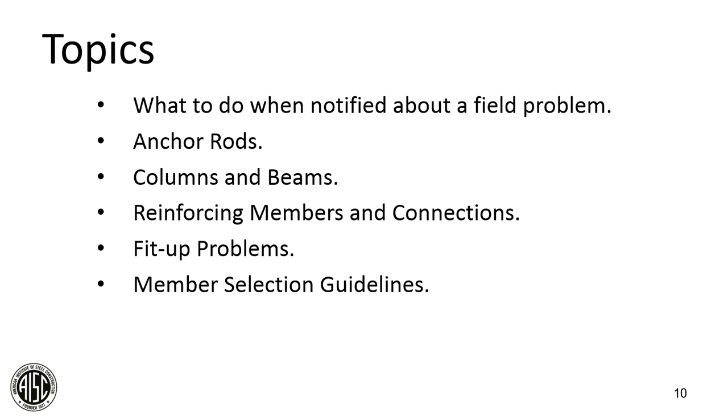Now, what to do when notified about a field problem? I think the most important thing is to make sure you have accurate information. If you don't have accurate information, you can waste a lot of time. So photographs, telephone calls, you need the information, especially if you can't get to the job site if it's some distance away from you. Act immediately to avoid any delayed charges. Whether you think you did something wrong or didn't do anything wrong, it's important that you jump in and help so that the delayed charges are minimized.

Next, try to determine the cause of the problem. Is a fix required? Lots of times you can, as we used to say, sharpen your pencil, and you may find that you don't need a fix. If no money is spent on a fix, then there'll be no argument as to who pays for it. Think primarily about labor costs in fixes—materials are cheap. The cost of the engineering, the cost to the erector and fabricator in doing the fixes, their labor is far more expensive in general than the material.

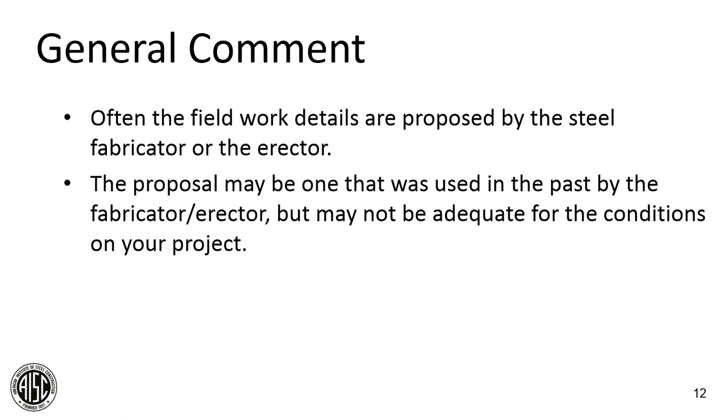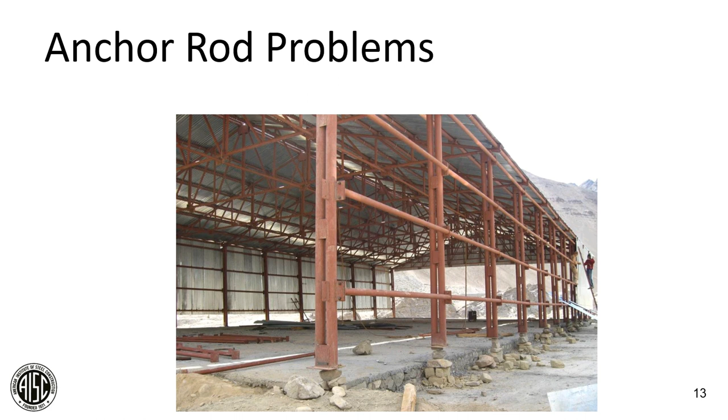So that's all a matter of sequencing. This is also one of my favorite slides.

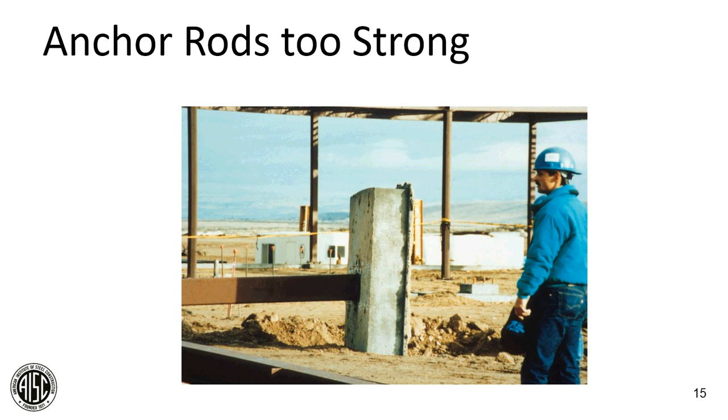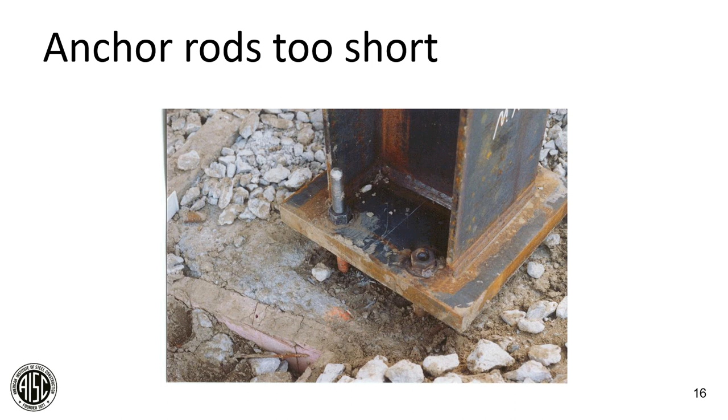If they're too short, there's lots of things you could do. You could extend the anchor rod by welding on a threaded rod to the anchor rod. You can use a coupling nut. You may have to cut some rods off. You may have to drill and use epoxy anchors. You might be able to weld the base plate to the rods.

And I'll say this several times throughout this presentation: remember that you cannot weld to high-strength rods, those that are 105 KSI anchor rods. You can also perform an analysis to see if the nut is not all the way on, say it's only 3/4 of the way, to check if there are enough threads engaged to do the job. Because you have to know the purpose of the anchor rods, and if it's just for temporary erection, then that certainly would be a permissible thing to do.

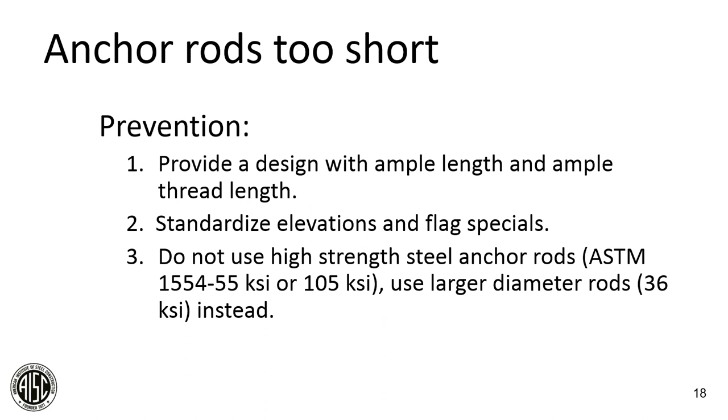How do you prevent this situation? Well, we're showing it because you can't always prevent things, but make sure you provide a design with ample length and ample thread length. Standardize the elevations of anchor rods as best you can, and make sure your plans flag special conditions, because the person setting the anchor rods will get used to one detail and may forget about special situations, and that's when you run into problems. As I stated, don't use high-strength anchor rods, 55 or 105 KSI. It's often better to use larger diameter rods, like 7/8 or 1 inch, because then if welding is a solution, it's much easier to accomplish.

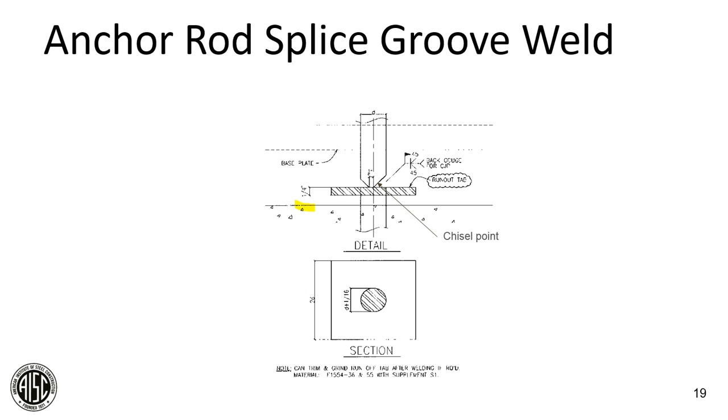Here's a detail of an anchor rod splice. Let me see if I can get a pointer up here. I'll use a highlighter instead. Here's the top of the concrete right here. And this is a chisel point coming down, with a backer bar here. That solution has been used successfully.

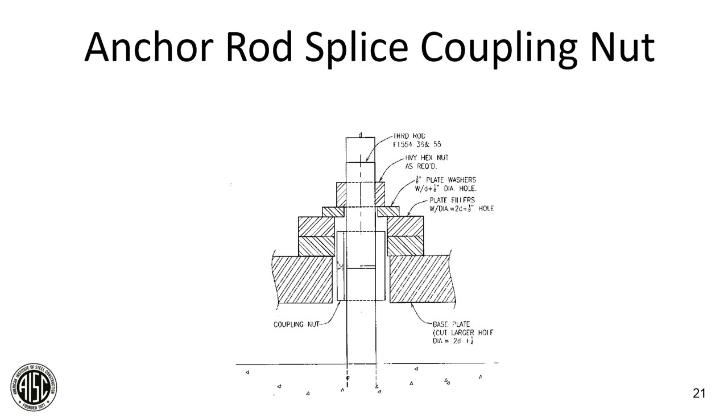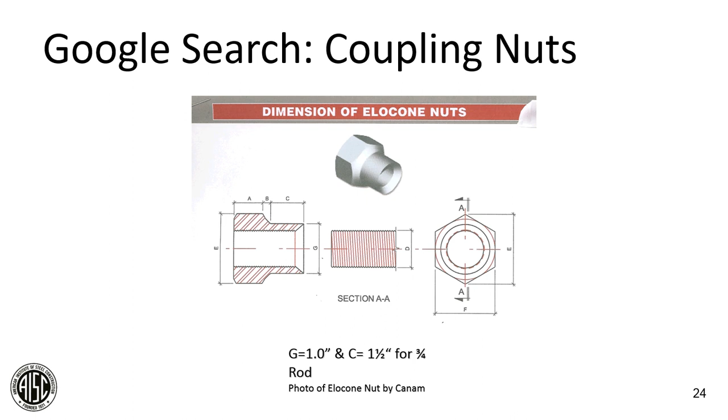You can certainly provide washers if they're too long, kind of like a little pipe thing done in the previous slide. You can weld the rods to the base plate if insufficient thread length exists, so long as they aren't high-strength anchor rods. Or you might be able to thread the rod in place to run a nut down.

Prevention: make sure your details have plenty of extra threads on the anchor rods, and again, check for proper embedment if they are too long.

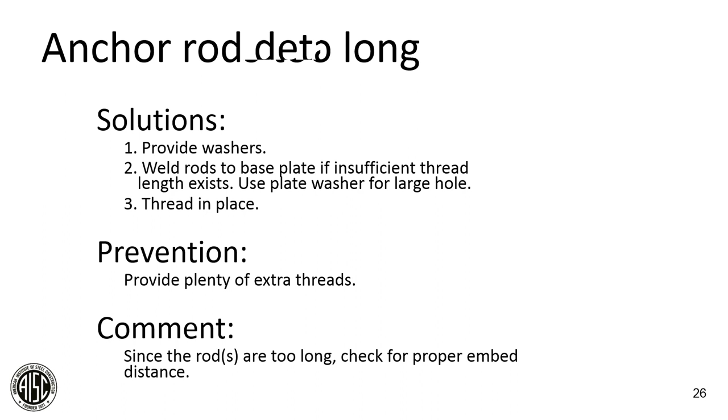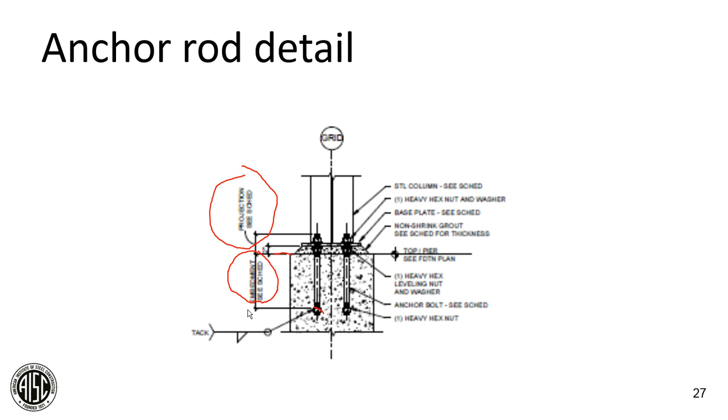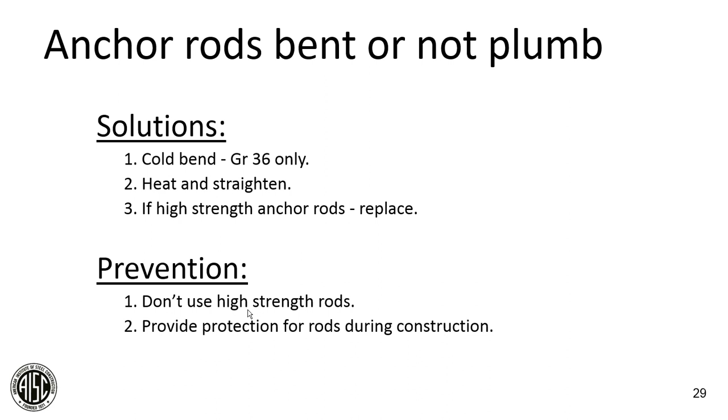Often you can cold bend A36 rods back to being straight. You might also be able to heat them and straighten them. Again, that's A36 material. If they're high-strength anchor rods, you probably can't bend them back because there's not enough ductility to keep from cracking them. So I recommend, if at all possible, not using high-strength rods. You're better off using bigger diameter 36 KSI rods, and certainly there should be protection provided for the rods during construction.

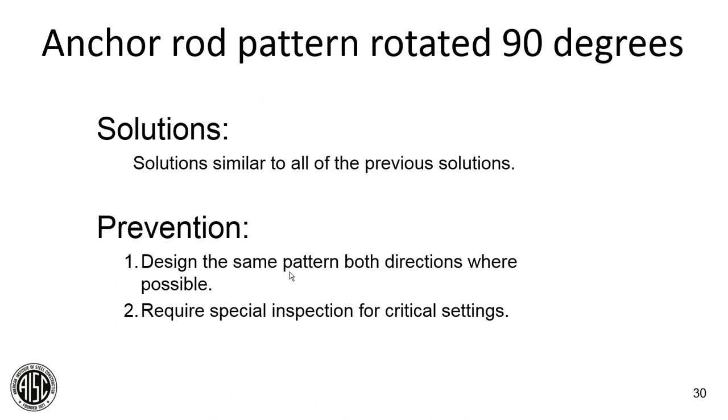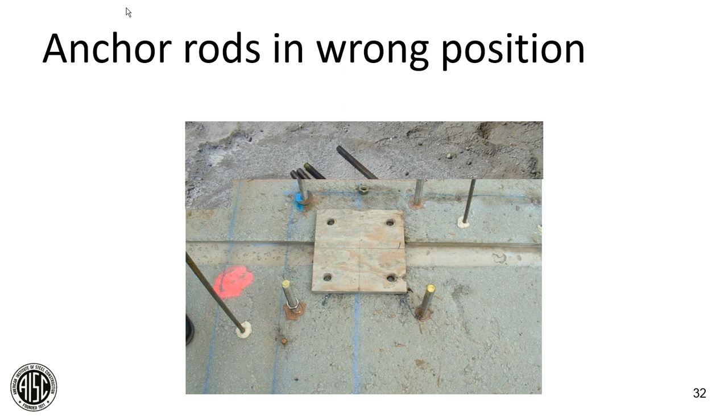Again, for thinking about anchor rods in the wrong position, this was an interesting project where the detailer showed the distance on the setting plate incorrectly. It was supposed to be a setting plate that would accommodate the anchor rods as they are shown outside of the setting plate. So what happened was the anchor rods had to be burned off and new ones drilled in, and it was a fairly expensive situation. You can see here where they're burned off. There were, by the way, 1,300 anchor rods on this project that had to be redone.

So what are some of the solutions? We've talked about some of them. Evaluate the need for anchor rods. Cut the rods and use epoxy anchors if required. You might cut the base plate and use plate washers. You might on occasion have to fabricate a new base plate. Might have to modify the column web or flange as required. You might have to bend the rods into position, and that may of course cause you to chip away some concrete to be able to do that.

From a prevention point of view, we say use a qualified field engineer. It wouldn't have to be a registered surveyor, but a good field engineer to lay out the anchor rods. We often say to survey the location of the rods before column fabrication. That's kind of a joke in the sense that with all the fast track things we do today, quite often that is not done. But make sure you use AISC recommended hole sizes, use symmetric patterns for the anchor rods, and use wood or steel templates. The key word here is firmly fastened to the footing or piers so that you have the correct location of the rods.

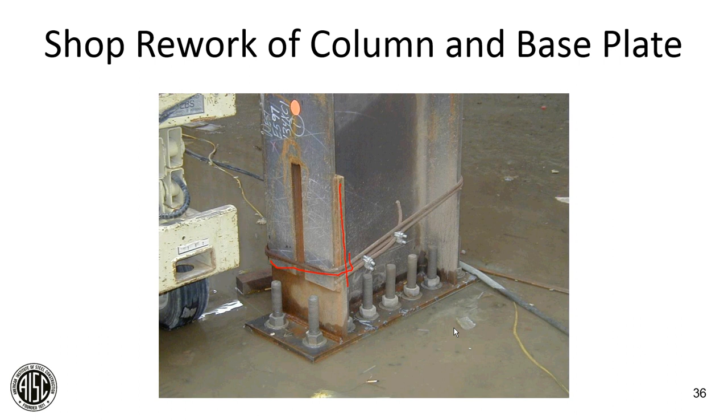This picture just shows a condition where anchor rods are in place and the column had to be modified and then welded to the plate as shown here. You can see here was the original flange, and this is the new column, but it was left in place. Again, I don't know why these were put in the wrong place, but they were, and I don't like the fact that there were so many. I would have thought that the engineer might use fewer anchor rods.

One of the other things that happens, base plates can punch through leveling nuts. What's the solution to that? Well, generally it's to jack the column up and grout it. Prevention: use large, thick washers when using leveling nuts so that they don't punch through. Specify proper grouting time in your specifications. And for heavier loads, it's probably better to use shim stock or setting plates instead of leveling nuts when you have the large loads.

So those are, again, things that can happen. Let's discuss for just a moment what the proper specification for anchor rods is. I think most of you know this today, but anchor rods are controlled by ASTM F1554. There are two items of interest on 1554: they relate to classification and also product marking, and that's color-coded.

The A36 rods are supposed to be color-coded and shown in blue, 55 yellow, and 105 red. The 55 rods can be obtained in diameters up to 4 inches, and the 105 rods can be obtained up to 3 inches in diameter. Also, for the 55, you can ask for what's called supplement S1 to require that the material is such that it is weldable.

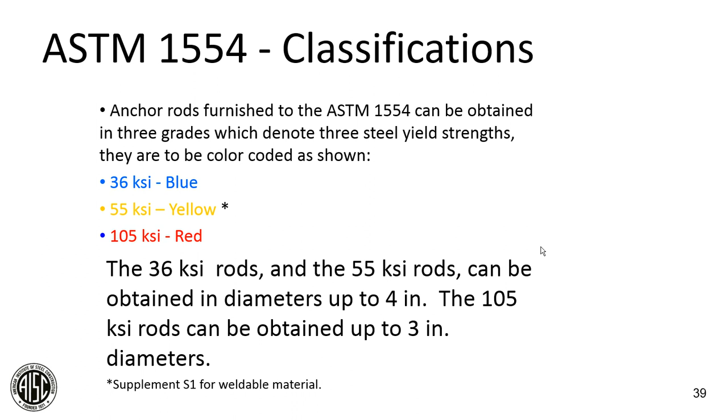I mentioned earlier the recommended anchor rod hole and washer size. This is straight out of Table 14-2 of the 15th edition of the AISC manual. You can see for the anchor rod diameter given, the hole diameter, minimum washer dimensions, and then the minimum washer thickness. So that's right out of AISC, and I recommend that you use those particular hole diameters.

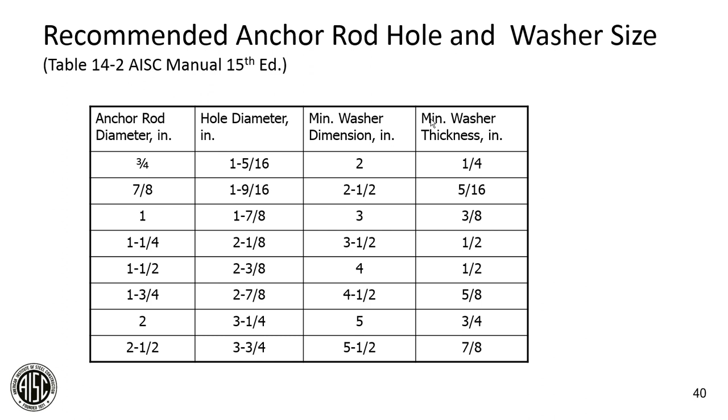Make sure that you use F1554 material. Use grade 36 where possible, and rather than high-strength anchor rods, use larger diameter A36 rods. Use a symmetrical pattern if possible. Use heavy hex nuts.

Coordinate anchor rods and reinforcing steel. Especially, if you have a condition with a pier and several anchor rods, things can get quite congested. Make sure things are drawn to scale so you know whether the anchor rods can actually be positioned properly into the pier. And don't use piers that are too short, which don't allow for the development of the anchor rods. A lot of the calculations for this are addressed in AISC's Design Guide 1.

Some more information on details. Provide adequate grout thickness, usually at least 2 inches. You can use setting nuts for lightly loaded columns, steel shims for heavily loaded columns. Consider setting plates where grouting may be difficult. And you can often solve some nice problems using epoxy anchors for fast track jobs and complex layouts. Again, consider construction sequencing when laying out the pattern.

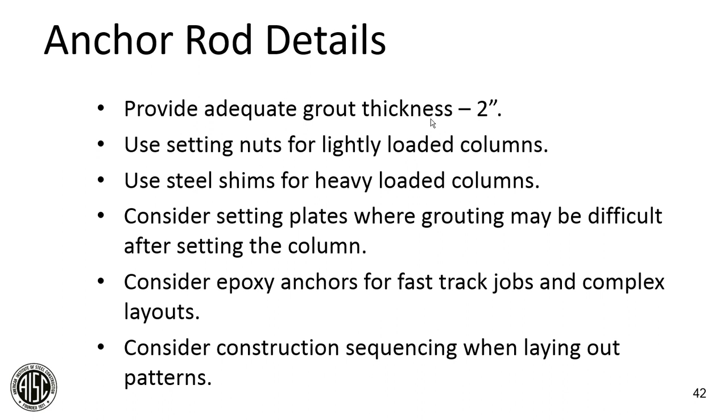Remember that OSHA 1926.755 has the requirements of a minimum of 4 anchor rods, and information about an iron worker with his equipment being 300 pounds and 18 inches eccentric from any column face. To me, it's sort of a phony thing in that the requirements on the anchor rods are so minor for that 300 pounds at 18 inches.

I think a lot of erectors get a false sense of safety in that they think the anchor rods can adequately prevent the partly erected steel from falling over under wind, but it's not true. Those have to be evaluated.

OSHA says that you can't repair unless you get the approval of the structural engineer of record, and the approval must state how you're going to do the repair or how you're going to guy the column if it only has 2 anchor rods. And lastly, the contractor shall provide written notification to the erector of any repair or modification that he or she may do. So I spent almost half an hour on anchor rods, and again, it's because it happens so frequently. I wish we could get rid of problems with anchor rods, but I'm not sure we ever will.

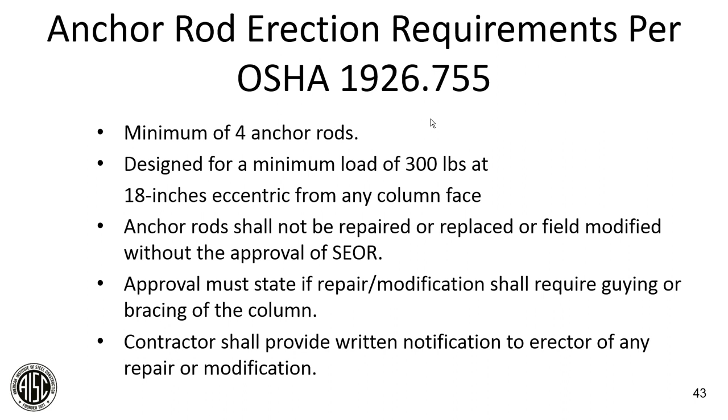So let's now discuss some columns and beams, and some requirements for repair of them.

This is a funny looking column, of course. It was in a steel mill in the scrap yard, and the columns and crane runways in scrap yards are magnetic cranes generally. They are used and abused, the building significantly. In fact, AISE says that when you have a Class E magnet crane, the lateral thrust you must design for is 100% of the lifted load.

Well, this particular column had been reinforced once. It had been hit many, many times, as you can see, with the magnet, and did some nice damage to it. But hey, it's still standing up there. Steel is, what's our motto? Stronger and smarter. So it stayed up.

One of the things that happens fairly frequently is the column is not plumb per AISC Code of Standard Practice tolerances. So what you have to find out is, is it out of plumb? And if it's out of plumb, what can you do?

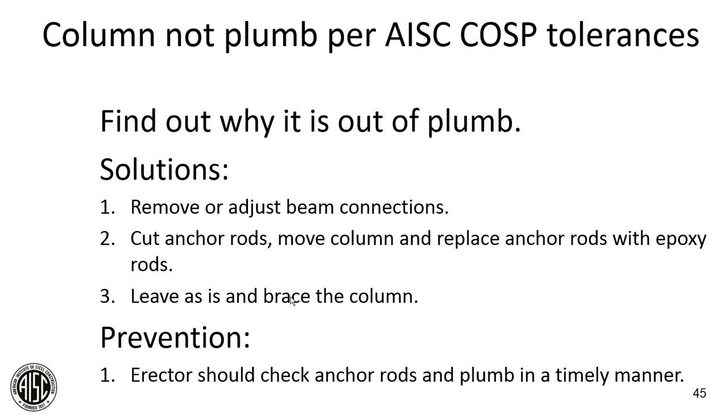Another thing that happens is after erection, the beam line is too short, which causes out of plumb columns at some locations. Weld shrinkage can cause shortening of approximately 1/8 inch in most CJP welds. And what do you do in that case? You may have to cut some loose and correct by weld build out or some other means to get the proper plumbness of the columns. That usually happens in very long lines of columns.

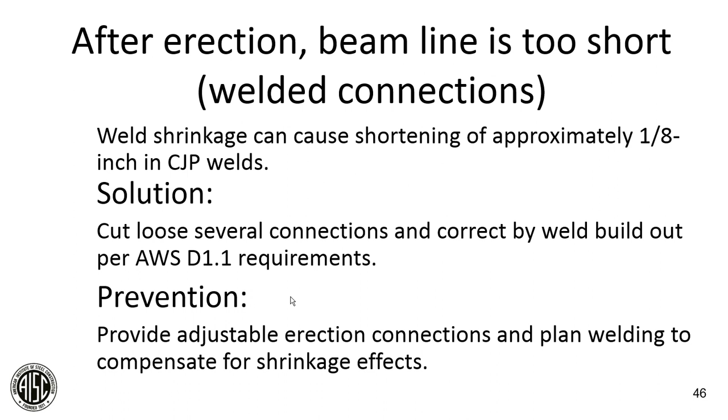Prevention: provide adjustable erection connections and plan welding to compensate for shrinkage effects. If after erection the beam line is too short or too long, and this can happen with moment end plate connections, if things have gotten too long, you may have to remove a beam. You may have to refabricate the end plate. You may have to shorten it up.

Another item which comes up on occasion is camber problems, primarily in multi-story projects. So you've got to think about what members you should camber if they need it.

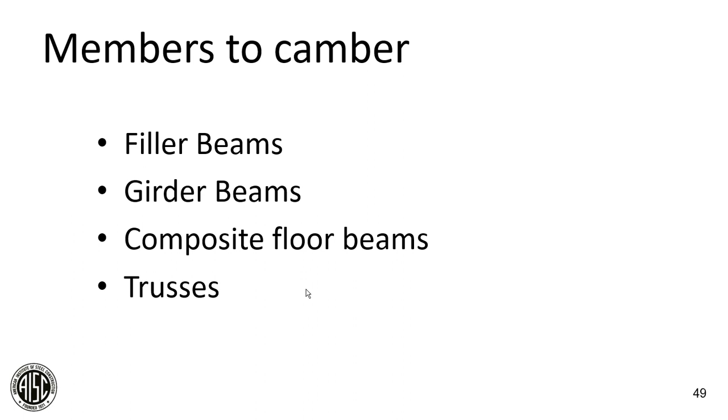Certainly filler beams are often cambered, the girder beams, the composite floor beams, and trusses. So those are the members that are often cambered. You might call me a bit of an ironmonger at times—if you don't need too much camber, I think you're often better off just selecting heavier beams and not being so worried about camber. But anyway, these are the ones that you should camber.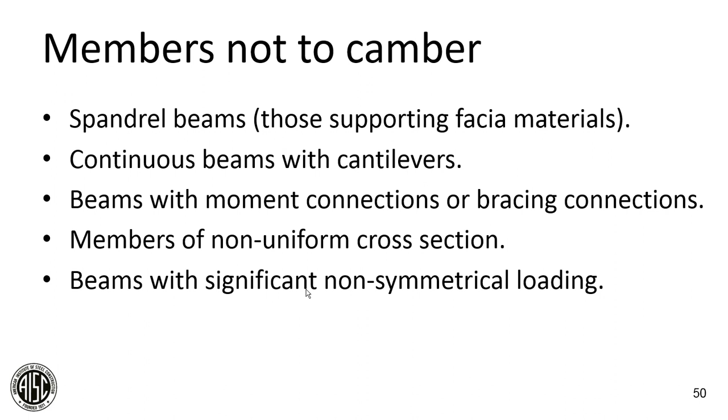You also should not camber beams that are subject to torsional loads. Beams less than 25 feet in length—generally 20 to 25 feet—you don't want to camber, because they don't have enough grip in the cambering machine to do the job. It's very difficult, so just use a heavier member.

You don't want to camber beams with webs of 1/4 inch or less, because the bending will likely cause the webs to buckle, same if the flanges are very thin. You don't want to camber something that requires less than 3/4 of an inch. And generally we do not camber runway girders—they're heavy enough that they don't need it, and it doesn't help.

So you might ask then, okay, we can camber, but what if there's too much camber? Some of the solutions are to place the concrete to a constant elevation. If you found out in time, you could remove the camber in the shop. You might have to replace some beams. Usually it's a concrete situation.

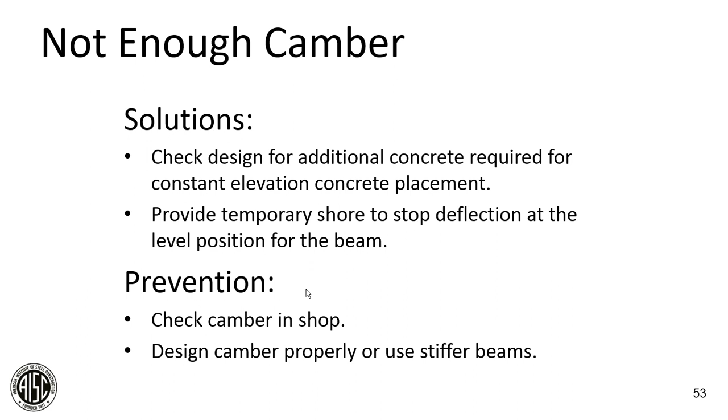Some cautions to think about: one thing you should consider is not to require as much camber for the beams at column lines as compared to filler beams, because the added connection restraint at columns will not allow as much of the camber to come out when the concrete is poured.

Also be very careful of camber differences between beams and open web steel joists. You can check with the SJI requirements on joist camber, and what you don't want is major differences with adjacent beams and joists, where the cambers are not compatible.

Also be careful of cambered beams or joists adjacent to non-cambered moment frames, braced frames or walls. I learned very early in my career about camber of deep, long span joists on a building—a hockey rink, I think it was a 200-foot clear span. I had a joist next to a masonry wall, and of course when it was set, it was roughly 6 inches above the height of the wall because I hadn't thought about the camber. So we all make mistakes—that was one of my early mistakes. I have more, but I don't want to tell about all the mistakes I've made.

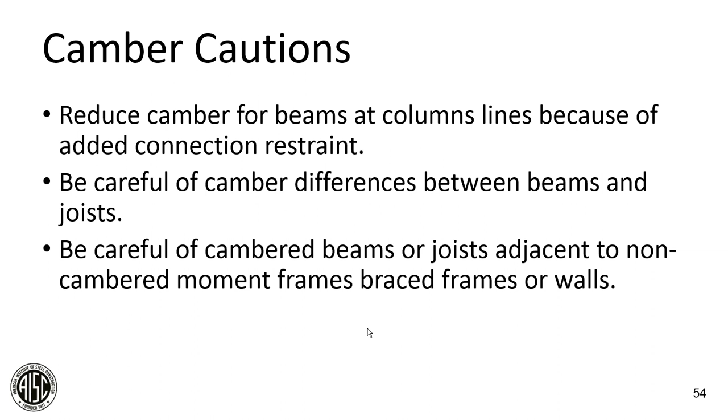From the AISC Code of Standard Practice, section 6.4.4, it says for beams greater than 50 feet in length, the camber tolerance is -0 plus 1/2 inch, with an additional 1/8 inch for each additional 10 foot in length or fraction thereof beyond the 50 feet.

The AISC Code of Standard Practice specifies that camber is measured in the unstressed position in the shop. You cannot measure camber once it's on the job site. If you want to check on camber, you do it in the fabricator's shop.

And what to do about extra concrete due to beam deflection during concreting? Solution: as I mentioned earlier, reevaluate the beam strength to determine if it can support the additional weight, or you may have to reinforce some members.

Prevention: you can design beams as though they're going to get extra concrete, and I think that's a very good solution because we know quite often that is going to happen. In our specifications we always allowed for about 10% more thickness than what the drawings called for, because depending on how they screed, you may get extra concrete. So it's a lot easier to have a little extra steel than to be worried about some overstressed member.

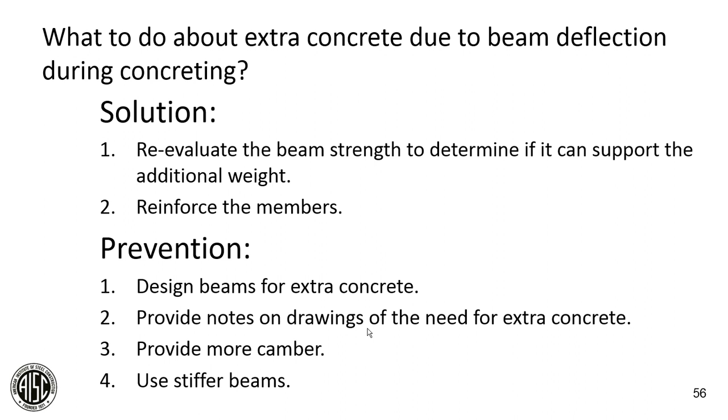A few comments now about shear studs.

What if shear studs break off during inspection? I think the way most people check shear studs is they put two studs in, then bend them over at least 30 degrees and inspect. They should bend over without the welds breaking, about 30 degrees. People just take a sledgehammer and knock them over, and if they're welded properly, they'll stay intact.

If there's only a few that might break, you can certainly fillet weld the studs in place. But if there's very many, you don't want to do that. So to prevent that problem, they've got to be installed properly. The stud gun has to be calibrated properly, and you can refer to AWS section 7.6 for qualification requirements.

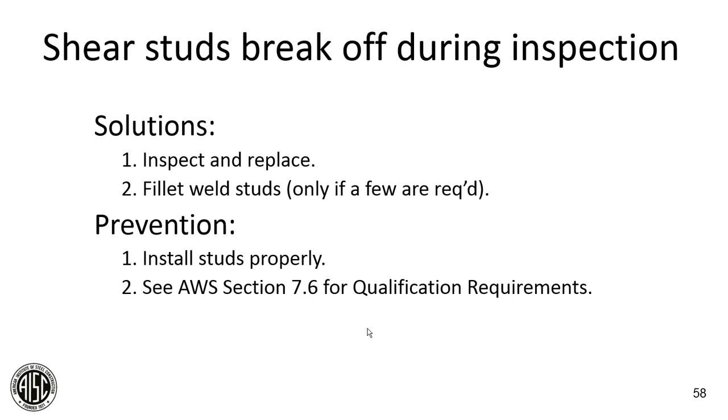Sometimes studs are too high, and this is found out, hopefully, before the concrete's placed. You can remove the studs and replace them. Again, you can use additional concrete thickness, or reduce beam camber by heat straightening. All those are expensive solutions, certainly, but if they're too high, they're too high.

Prevention: specify camber properly, or not at all. Don't use composite beams - that's a solution. And again, I've seen people use composite beams where they're short spans, and it just doesn't make sense to make them composite. Just forget the studs.

And also, you could design with some added capacity to prevent things. So if you need more concrete, you can get away with a little more concrete on the beams. A few comments now about fit-up problems.

The ones that I've seen most frequently are fit-up of weak axis moment connections, and I even hate to show this slide because it's a darn shame that we have a moment connection going into the weak axis of a wide flange shape. They're not rolled to have weak axis moment connections. You're far better off turning some columns in your framing situation rather than to create weak axis moments. But enough about that. If it does happen...

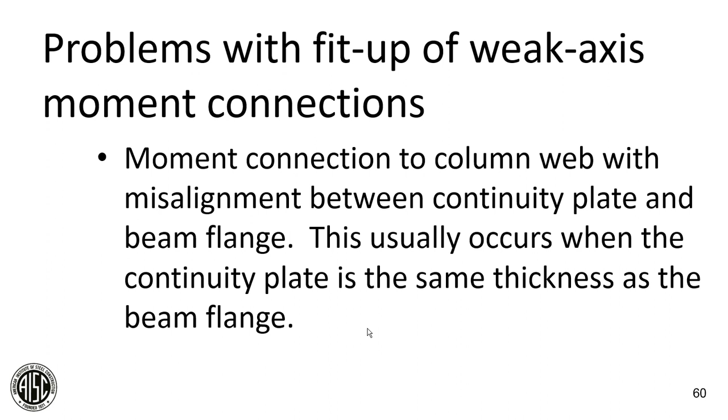Quite often there's misalignment between the continuity plates and the beam flange, and this usually occurs when the continuity plate is the same thickness as the beam flange. This particular slide shows that situation - the beam coming into the continuity plates doesn't hit the continuity plates exactly, resulting in weld problems.

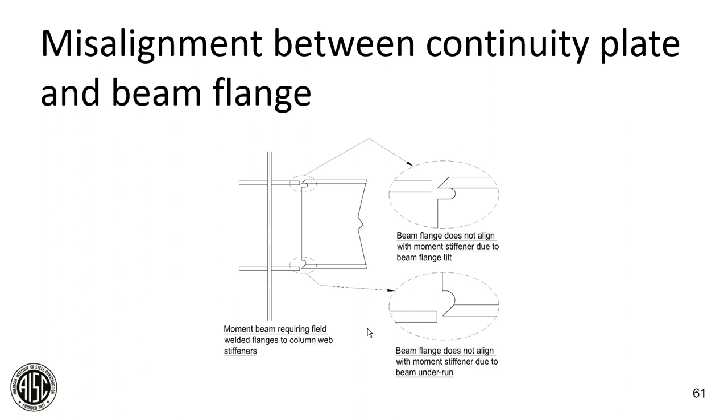This is all due to not the fact that maybe they were detailed incorrectly, in the sense that the detailer and engineers need to recognize the ASTM A6 tolerances on beams. I'll show a slide in just a moment on those, because otherwise this situation can occur.

What you should do is make sure that your continuity plates that you're framing into are thicker than the flanges of the beam. We show here upper flange stiffener detailed 1/4 inch greater than the beam flange thickness, and the lower one 3/8 greater. So they're bigger, but again, it's just material - that's not the big problem.

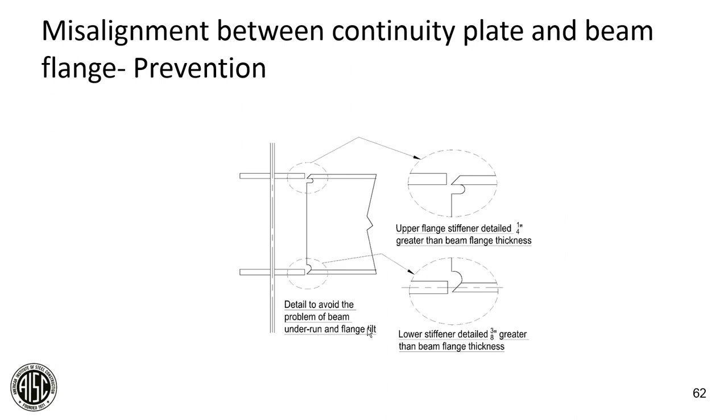If you can't get a proper weld there, you're going to spend a lot more money than having to provide a thicker continuity plate. The situation also occurs in conditions where you might have a bolted flange plate connection to, in this case, the strong axis of a column. You can see the gap here and here, and in this case the erector tried to pull the plates together, partially successfully.

This also happened to me once on a project where we had W36 beams and very large columns with wing plates like these. Unfortunately, the columns were fabricated by one fabricator and the beams by another, so no check was made on the under-run of the beams, and this caused a problem.

What you can do is provide some areas for shims in a detail like this, both at the upper and lower wing plates.

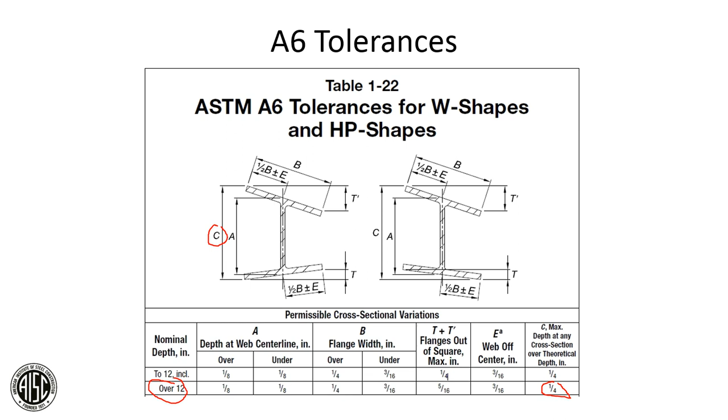Some solutions to this problem are certainly to jack against the beam by snugging bolts and then tensioning, and using shims, as I mentioned. If the beam does not fit between the plates, that's what I had to do on the big W36 I had - I had to remove the top plate and re-weld it to the columns. Provide the shim space, check your A6 tolerances, and modify the weld detail and weld sequence to reduce out-of-plane distortion.

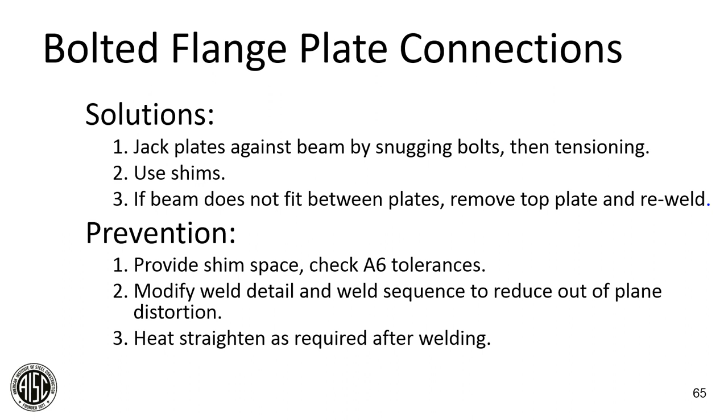Another question that comes up, and it's not really a field fix, is can welding to embeds damage the concrete? Yeah, too much heat can cause concrete spalling. However, I've seldom seen this as a problem unless somebody is really calling for very large CJP welds from a beam into an embed plate.

To prevent too much heat, I would suggest using fillet welds, looking at a proper weld sequence, and providing thick enough embed plates. By being thick, they'll dissipate the heat - they have a nice heat sink. As a rule of thumb, use a half inch minimum thickness for deck bearing situations, and at least three-quarter inches for beam bearing.

There is no such thing as an embed plate being too big, because they are often mislocated. Just make sure you specify them considerably larger in width and length or height than you need, because if they're off by a few inches, you want to be able to properly connect to them.

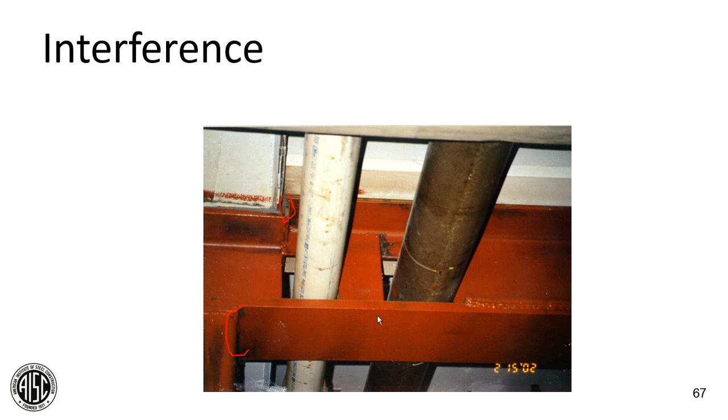This one I do know about. This building collapsed, but further downstream - it was the same column as the one shown here. At some point, obviously there were some pipes coming in, and one opening was pretty severe, and it buckled on the frame line one or two bays down.

That's just abuse, which you do find in some of the industrial applications. You don't find it that often, of course, in multi-story projects. But in some of the industrial applications, you find some crazy things that we can blame on the owner. I'm sure a fabricator didn't do that. I'm sure an erector wouldn't do that.

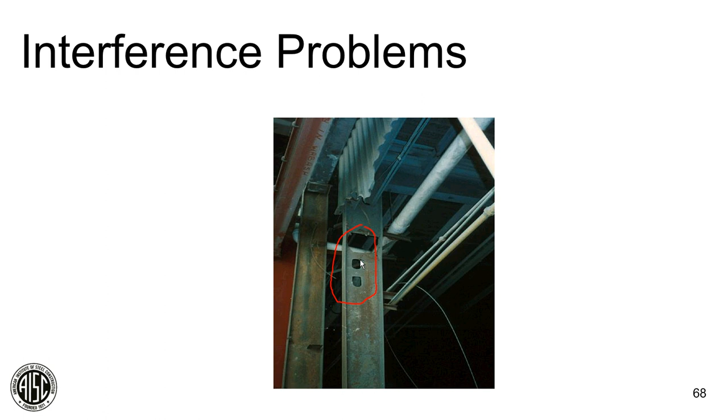Again, this was one I saw - pipe interference. The pipe was in the way, so of course the flange and part of the web was cut out so the pipe could be set down in there. Then a very, very nice splice was made here to keep the continuity. And yes, it was in the compression area, but it was at mid-span. I don't think if fully loaded it would work very well.

Also, one of my favorite pictures is shown here. Whoever's there last gets to do whatever they want to do to the structural steel, and here they made it fit, okay.

I think I have time for a cute story that I believe to be true. There was a project, I believe in Texas, with a series of open web steel joists framing into a beam line. The HVAC contractor came along and was going to put his ductwork right adjacent to the steel beam. Of course, the end diagonals of the joists were in the way, so he cut all of them.

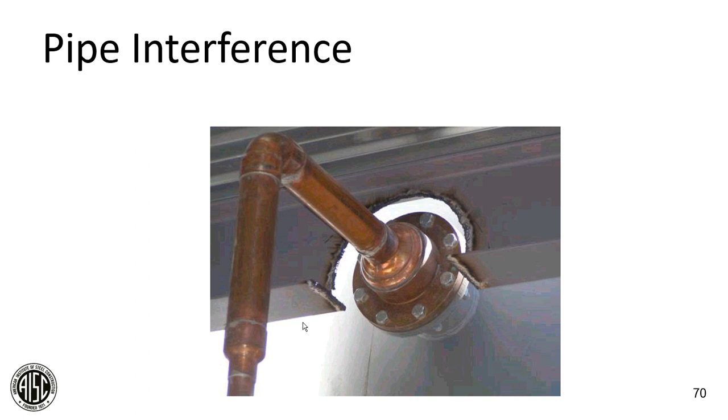I had the erector take down the liner panels at locations where bracing was located, and in every instance it was the same thing. There was no attempt made to even scab a new flange onto the girt system. I don't know, partly my fault I guess for not recognizing that the bracing would interfere with the girt. However, I would have thought common sense, which is sometimes stupid to think about, that the erector might have torched a little hole in the web and threaded the rods through there, which wouldn't have been much of a problem. So I made him reinforce all these situations.

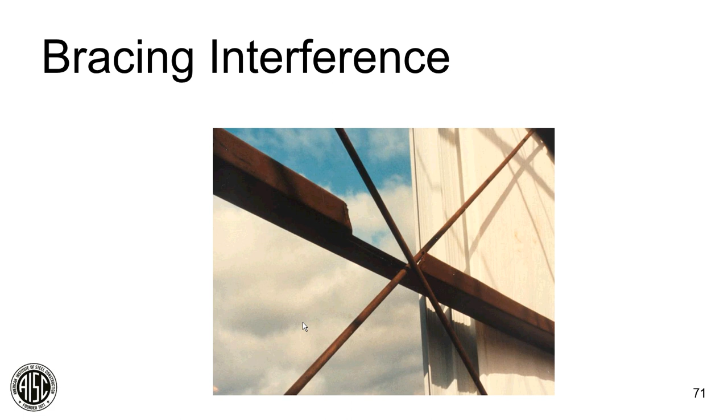There is an AISC educational document, Design of Reinforcement for Steel Members, Part 1 and 2, that you can look at by going to www.aisc.org/education archives. So you should be aware of that. It's just ideas - any idea you come up with, if you design it correctly, is going to be a good idea.

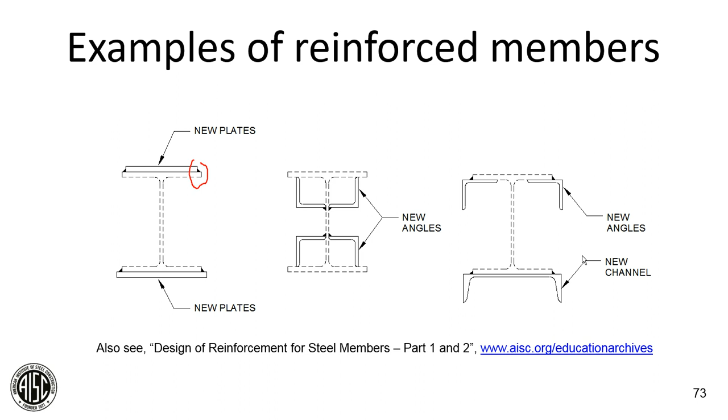So, reinforcing connections - solutions are wide open. It depends so much on the situation at hand. You can remove and replace the connection with a stronger one, obviously. Sometimes you might be able to use X bolts instead of having the threads included in the shear planes, which may solve the problem. You can add weld length or increase weld size many times.

Depending on the condition - maybe it's an old riveted job - you can remove old rivets or A307 bolts and replace them with 325s or 490s. You can ream holes and use larger diameter bolts. You can add web framing angles to a seated connection, or add a seat to a web frame connection. So it depends on the situation, but again, I think if you just use your head and design the reinforcement properly, you can solve a great number of problems.

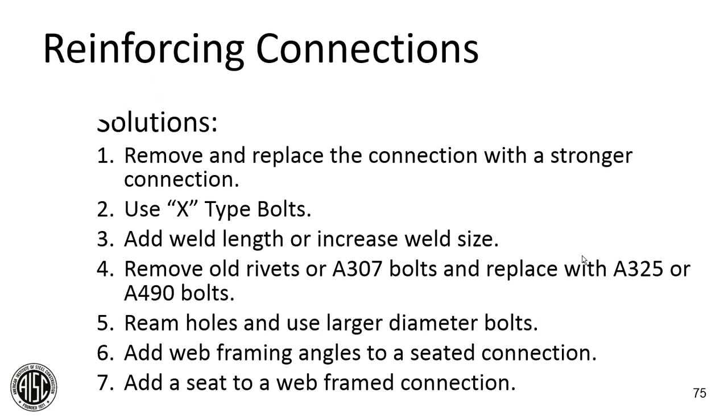Some other solutions: you can add weld to existing riveted or A307 bolted connections. You have to make sure it's a weldable steel you're dealing with. You can also add weld to existing high-strength bolted connections—I refer you to AISC J1.8 and 1.9. You can extend the length of framing angles by welding on additional length if there's additional length to be had, and you can sometimes add a second angle to a single angle connection. Use your head and design it.

More on fit-up: what if the bolts don't fit in the holes? Let's think about shear connections for a moment. The AISC specification section J1.8 permits load sharing between welds and bolts when four conditions are met. I won't go over those, but I encourage you to look at J1.8 for the details on when you can share welds and bolts.

For welded alterations to structures with existing rivets or bolts, section J1.9 permits load sharing when certain conditions are met. One of which is that the weld available strength must not be less than 25% of the required strength of the connection, and that's usually easily satisfied.

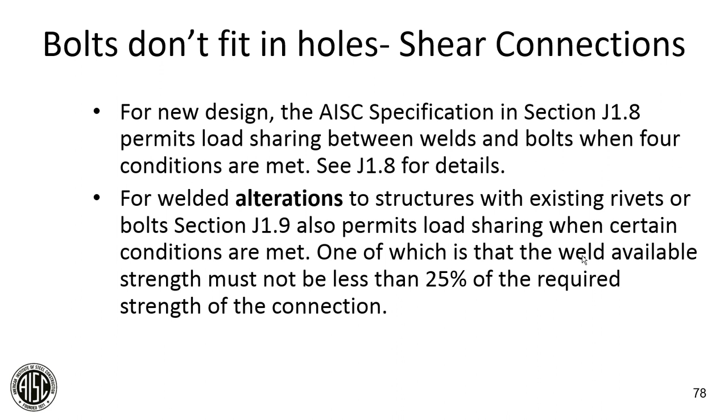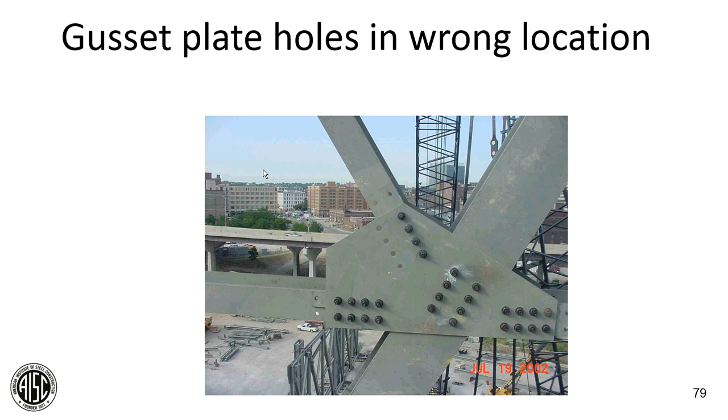The condition I'm showing here—I probably shouldn't say where it was, but it was a bad situation. You can see these holes aren't lining up with any holes in the member beyond. It's a big, heavy bracing connection, so it's just fit-up problems. Shouldn't happen, but it did. Here's another shot of a different connection, and you can see obviously that the bolts don't fit in the holes. Not nice.

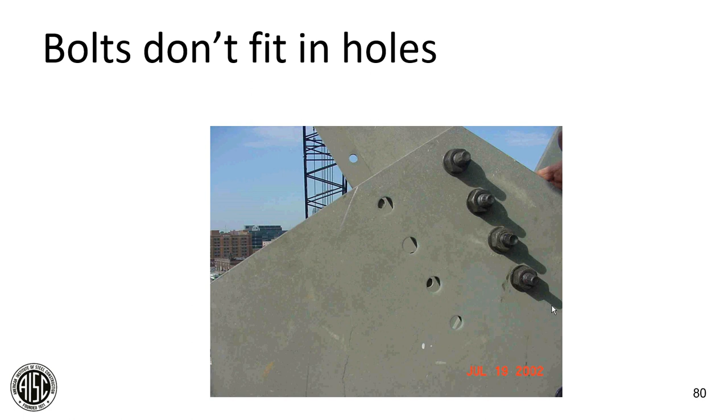What if they don't fit? You can ream the holes within reason, of course, and go to the specifications for your maximum oversized hole, for example. You can field weld, fill some holes and re-drill, or replace connection material—it all depends on the situation. Prevention, I'd say, is easy: by proper detailing and proper fabrication, it should not happen.

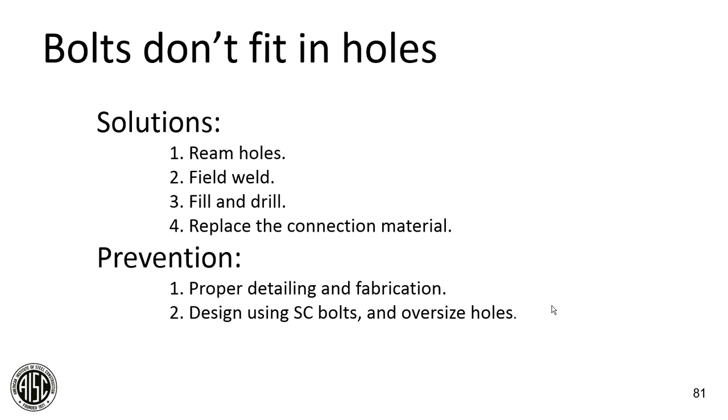If there are tricky situations, it's quite often nice to design using slip-critical bolts and oversized holes—that gives a little leeway on fit-up. What is too much reaming? RCSC specifies a 32nd of an inch each ply, but notes research that larger holes can be permitted without reducing bolt shear. Holes can be reamed to diameters up to and including the oversized hole diameters as shown in AISC Spec Table J3.3.

One of the main things to check, depending on what the connection's doing, is edge distances—make sure they're permissible after reaming. If you have insufficient edge distances, you can perform an analysis to see what the strength is, and you might have to add material to increase the edge distance. A good way to prevent this is to not design connections with minimum edge distances too tight. I think if you always add an extra 1/8 inch to edge distances, in most cases, if reaming has to be done, you won't create a bad situation with the edge distance.

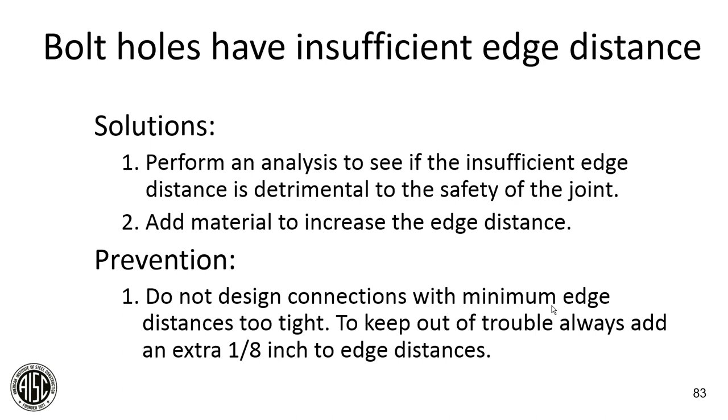Let's talk for a few minutes about member selection guidelines. A good guideline is to use deeper floor framing members when large copes might be necessary, depending on what you're framing into. You don't want to create a situation where a very large cope is needed on your filler beams. Actually, you don't want copes at all if you can prevent it by proper detailing with proper connections. So think about how the members are coming together and the size of the cope that might be necessary.

I often remember talking to young engineers, saying one of the early things you should do before selecting member sizes is to think about what kind of connections you're going to use—it's the type of connection that may control the size of your members. An example would be in a truss: if it's going to be a field bolted splice, make sure the member is big enough so that when the holes are punched in the flange or web, you still have enough net section to carry the load. There's all sorts of things the engineer should think about when selecting the members.

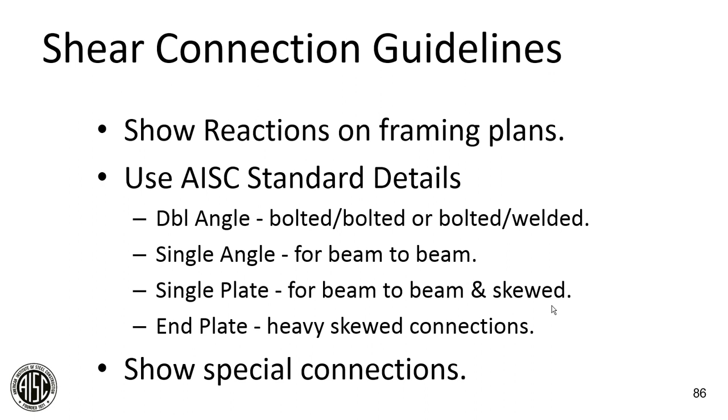Show the reactions on framing plans, and use standard AISC details: double angles, single plates, end plates. Show special connections on your plans. You may want to provide the actual moment envelope if you're not designing the connections.

Some design considerations: end plates may be limited by bolts or column flange bending capacity—they may or may not be the right solution. CJP welds are so easy to specify, but generally very expensive, so think before you ask for a CJP weld. Top and bottom bolted plates are an option if less than Mp is required. AISC used to talk about clean columns, but size the column to avoid reinforcement. Pick a bigger column to eliminate doubler plates in particular—get a column with a thick enough web where you don't need a doubler plate. They're very expensive to fabricate.

Some thoughts on cantilever design guidelines: again, provide the actual moment and shear forces, and indicate if camber is required. Use end plate connections where possible for erection ease and safety. Shop weld on short cantilevers where possible to avoid having to do those in the field. Consider making the beam continuous—stacking it up on top of the columns—for long cantilever situations. It's a better way to do it.

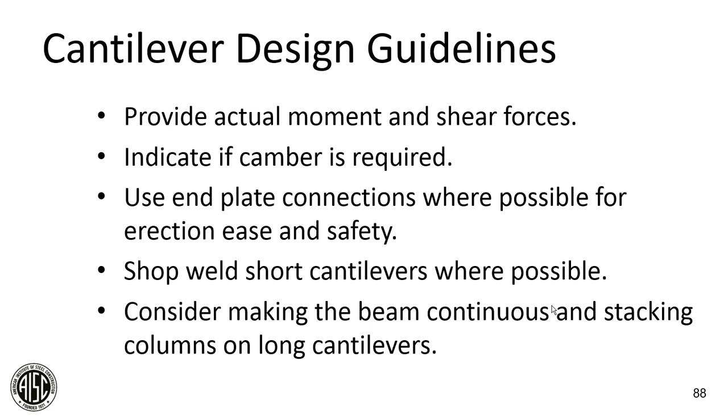A few bracing connection guidelines: show all forces, including transfer forces. You've all heard of these things, but sometimes we forget. This is a good one—consider modifying work points for extreme connection geometry. If you have a big truss, for example, framing into a column flange, you may want to make the work point be at the flange to reduce the size of gusset plates. If you take it to the center of the column, fine, but it can cause much larger connections. If you go to the work point at the flange, you may have to increase your column size, maybe one size, because of some extra moment, but it's probably cheaper in the long run. And allow oversized holes and field welding.

I guess that's the formal end of the presentation. The next series of slides I've shown in talks many times—if you've seen them before, fine, take a nap. If you haven't, or even if you have, there's always something a little different you might pick up. Brent Leu always wants me to show these slides because they are such a nice story.

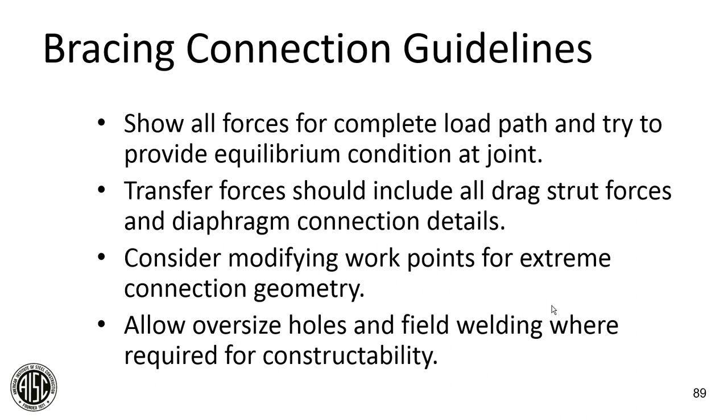So I've called this the classic overhead crane building. As some of you may know, I spent most of my career in the industrial building world, designing crane buildings and looking at various crane buildings and the problems thereof.

This particular building I'm going to show you—I worked with the owner on several projects. We got to know each other quite well, and we got to know the games, I think they were games that he played, and I subsequently played games too. The first project I did, I went in and gave him the price, and he said, oh my God, that's way too expensive for what you're doing. I said, well, you know, I really want the job, Lou. He said, well, you're going to have to take some money out. So, not that I liked it very much, but I did take some money out, and I got the job.

I figured out that's going to be his hot button. So the next job, I inflated the price by about 30%. He went to him, oh God, that's way too much. I said, well, okay Lou, what do you want me to do it for? Well, got it down to the price I wanted. This went on for years. I think he knew what was happening, but I think he also thought, I'm doing my job for the owner in getting the right fee. So anyway, we had a great time.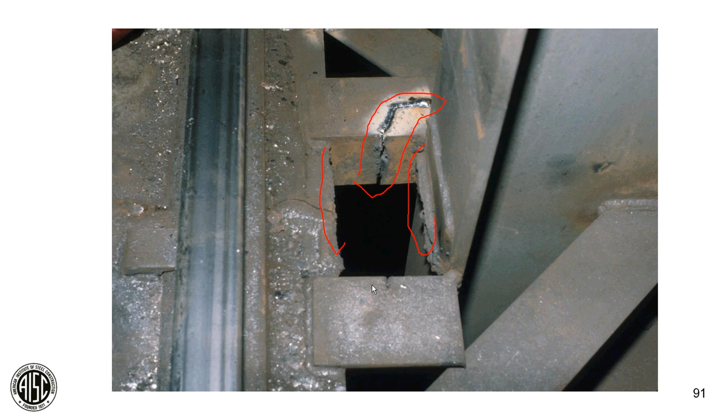So anyway, I went into this building. And the crane runway, the first thing I see, of course, is a nice crack here. I also see that something's been torched off here and torched off here. Originally there was a tieback that went from the column flange over to here, and it cracked because the girders were designed as continuous girders. In fact, you can see that a weld crack happened right along here due to fatigue. So somebody cut this off, realizing that the girder could not rotate properly at the column, and put in these heavy angles, at which point they fractured at some point in time. Somebody tried to fill them in with weld. So the tieback system was a disaster.

Most fatigue problems that I've witnessed in crane buildings do occur at the tieback location. Here's another one, and here again it had been cut off, and somebody put some nice little plates on here thinking they might work. They must have broke because they reinforced with something here. Now the thing to know, again, notice that this weld has cracked all the way across the girder.

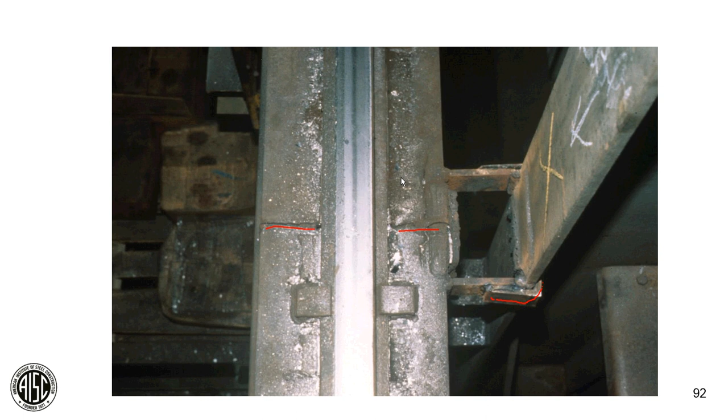But notice how nice and shiny this runway rail is. And notice all the stuff on the top of the runway channel cap. That's metal, and it's metal off of the crane rail. This occurs when a crane is misaligned and it goes up and down the runway and galls into the rail and chews it up. This building was suffering from total misalignment, and the building was moving around, and like I say, they couldn't use it as intended.

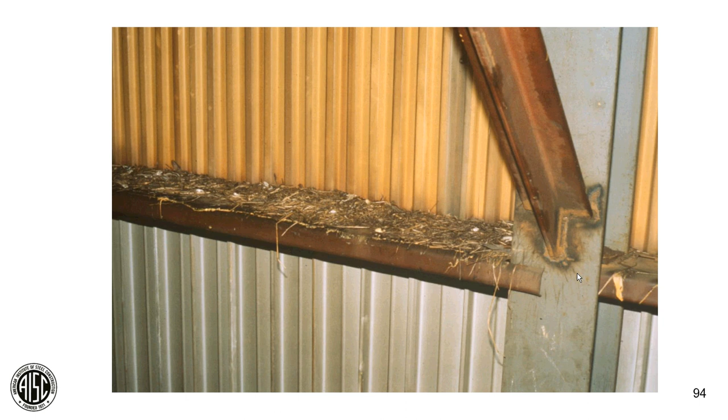One of the problems was that the building at one point in time was filled with pigeons. You don't have to believe this story if you don't want to, but I think it's true. The little pigeons would poop on the crane rails. And when the crane operator would go to put on the brakes of the crane, the stuff was real slippery and the wheels would slide, but on the adjacent runway, if they hadn't pooped right there, the rail would bind up, the wheels would bind up because the brakes are on. The other one slips and slides, and it racks the crane. So the owner put this yellow goop on his girt system, and the poor little pigeons would come and they would stick to it, and then of course he'd take the pigeons, and I'm sure he took them out into the woods somewhere and gave them a nice safe home, but he got them out of his crane building.

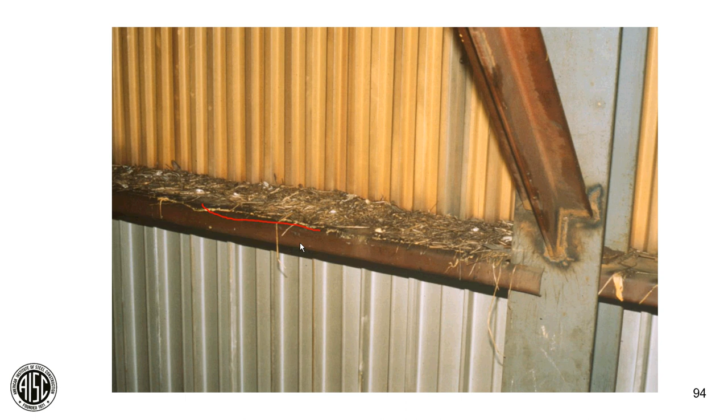Now when a crane gets misaligned, you can see the crane stop here. What the operators will do is they'll start at one end of the runway and they'll ram the crane into the stops to take the skew out. And you can see that had been done a few times here.

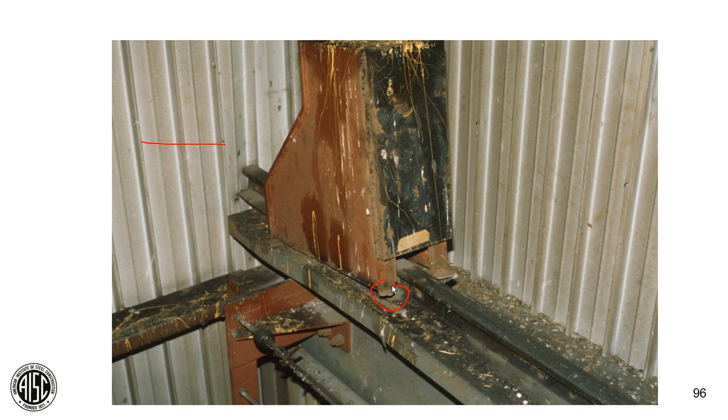You can see it's been ripped away from the channel cap, and that's because they were just ramming this crane in to straighten it, because the building is moving far too much.

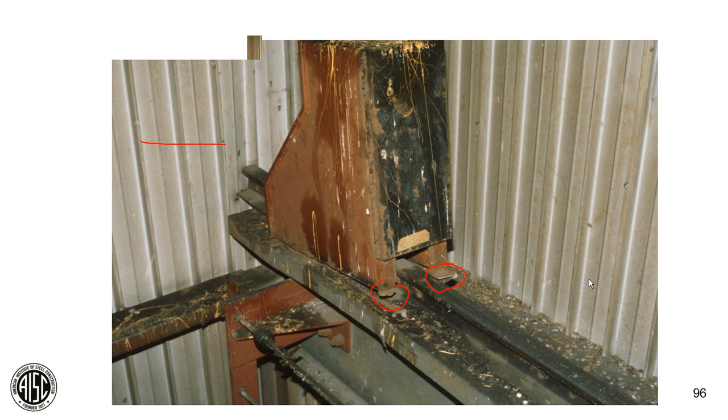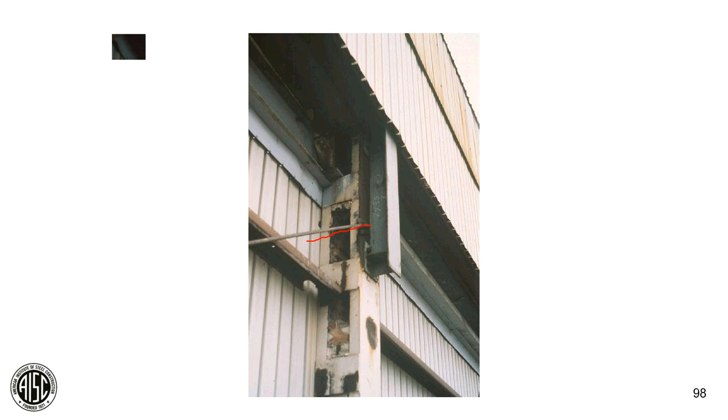So when all else fails to laterally stiffen the building, then what you do is you lean it on the building next door. Fortunately, the owner owned that building as well. But this is a fine piece of engineering.

You can see the slenderness ratio of these beams are taken care of by these nice pipe struts, both weak axis and strong axis. And believe it or not, that did work. This is a brick building, but they were tied into some steel over here. So that's my favorite slide.

I'll probably never show these again, but so you may have the final seeing of those.

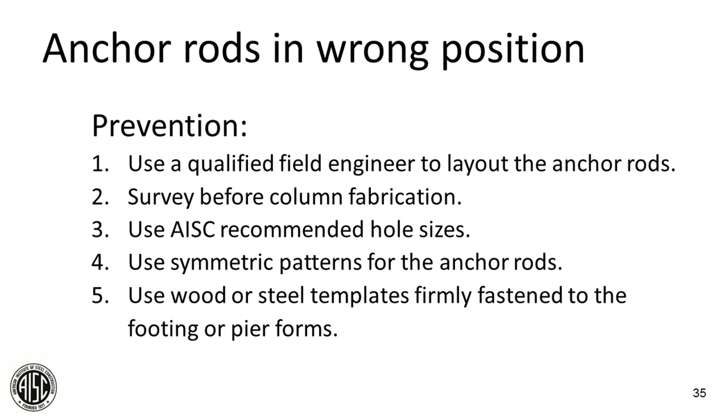Okay, then moving on to slide 37.

The use of leveling nuts, is that typical, or is there certain situations where you'd see leveling nuts used? I see leveling nuts used on maybe one-story, possibly two-story buildings where the loads are pretty light, and they can adjust the height of the base plate easily with the leveling nuts. But if the loads get heavier, then shim stacks are probably a better way to go, because you don't want to punch through the leveling nuts. If you're going to use leveling nuts, you should have a thick enough washer so it doesn't do like a punching shear problem on the washer.

And then for column base plates that are set on shim packs at erection, should the shim packs be removed or left in place? I think you can just leave them in place. I don't see any reason why they would have to be removed.

Okay, I should have the slide up here. I'm sorry, I don't. The requirement for 4 anchor rods minimum - the question is, is there differentiation made in defining a column versus a post? I don't think OSHA does. I'd have to recheck it, but I think they say a post can have just 2 anchor rods. But I don't think they really declare, and I could be wrong, what's a post and what's a column. To me, a post would be a 1-story little post underneath a beam. But I'd have to check. I don't think they differentiate, but they do say that.

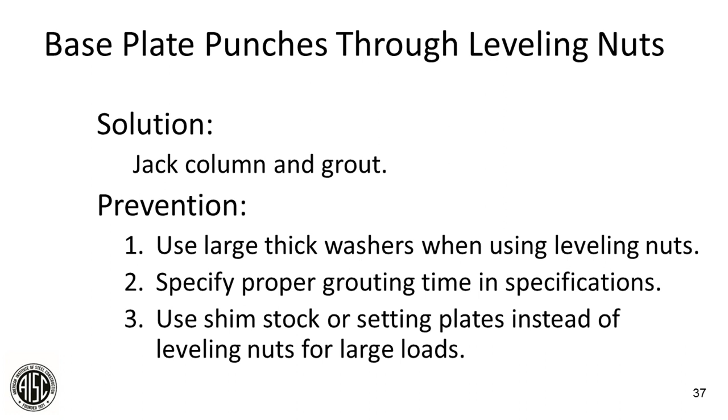All right, a couple of questions on camber. Regarding too much camber, the question is, would you consider flame straightening in the field to correct an over-cambered beam? I guess I would consider it, yes. Obviously you need a person or persons knowledgeable in flame straightening so they don't screw things up worse than they are. But yeah, I think that is a potential solution. I've never encountered it, I've never had to do it, but I think it is something that can be done.

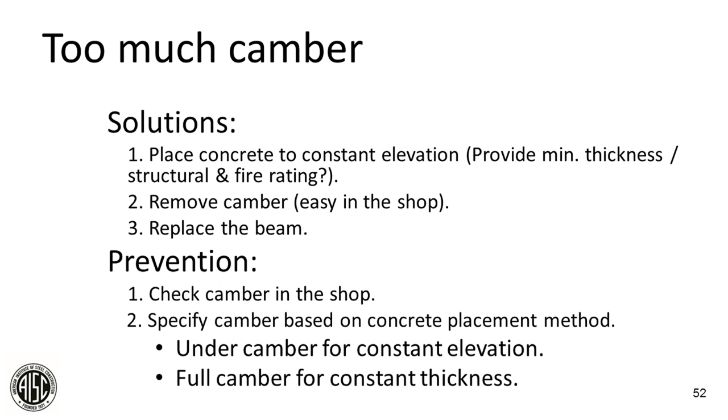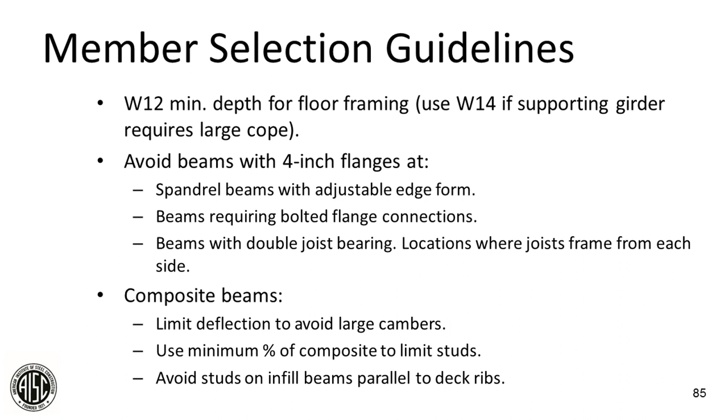Your second bullet point here, avoid beams with 4-inch flanges. The question is, why couldn't you place the joist staggered to avoid requiring a larger flange? Yes, you can. It's just kind of a crazy layout, and it may affect - well, if it's a floor, obviously the deck has to be coordinated with the offset joists. But yeah, you can do that, there's nothing wrong with that. It's just easier and simpler to have something with a 5-inch flange. Let's sell some steel, you know. But yes, the answer is yes, you can stagger the joists to accomplish that.